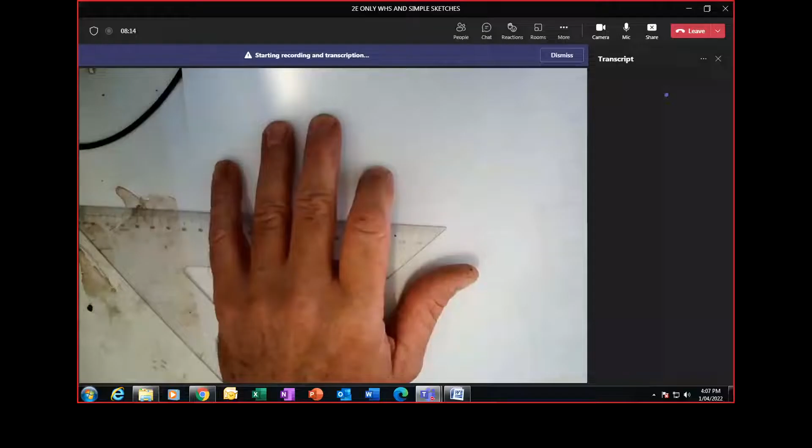Okay guys, so back with another drawing. This time we're going to draw an exam question. So we're actually going to draw from Word. What I usually try to get out correctly in class and then draw is basically written down for you guys to follow. So just sort of think of it like that. So we'll just look through a typical sort of exam question.

Question 1: using a scale 1 to 10, provide a typical sketch drawing of a complete vertical section through a timber frame house with platform flooring supported by an external 110 brick perimeter wall on a 400 by 400 RC strip footing. Reinforcement is this, L11TM top and bottom with R10 stirrups at 900 centres. That's pretty easy. All right, so that's one.

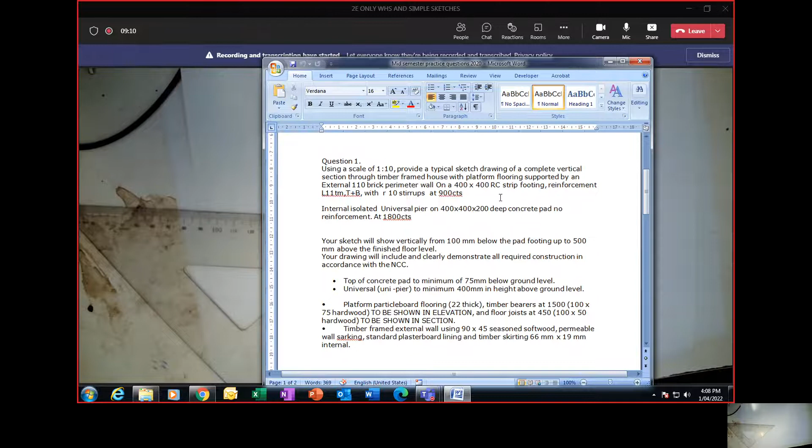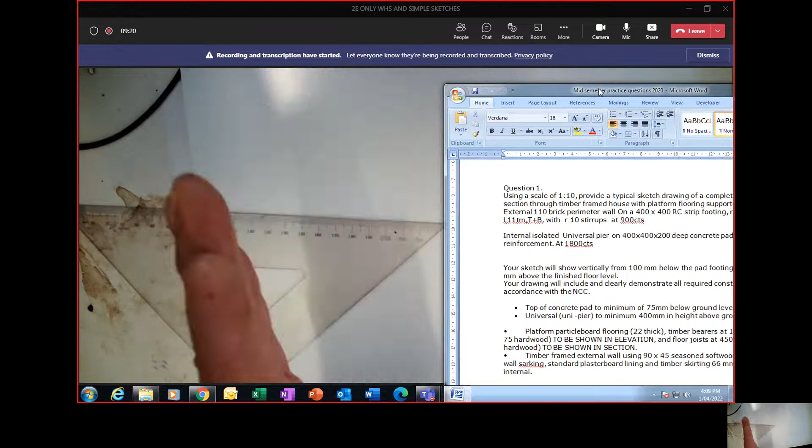It means that the timber frame comes all the way to the front, all the way over, and there's an external perimeter wall underneath that. That's, as we know, going to be a minimum of 400 off the ground line at least. And we've got some mention of an internal isolated pier, universal pier, uni-pier, steel uni-pier. We remember what they were. We drew one of those. Just on a 400 by 400 by 200 deep concrete pad, no reo, and they're at 1800 centres like all isolated piers usually are, and are in accordance to code.

Your sketch will show vertically 100 millimetres below the pad footing and 500 mil above the finished floor level, so it wants at least 500 millimetres of wall frame showing. The drawing will include and clearly demonstrate required construction according to NCC: top of concrete pad 75 below, universal unipier minimum 400 in height above ground level. Okay, so we know that. Platform flooring, so that means particle board flooring. We mentioned it was a platform floor, so that means it goes underneath the wall frame.

We're talking about the bearers here, timber bearers at 1500. Well, that's wrong. That should be something like 1800 centres actually. 100 by 75 hardwood to be shown in elevation. So that's the long edge, we're looking down the face of them. And the joists are at 450 centres, it should say. 100 by 50 hardwood to be shown in section. So you're going to show every joist along the bearer, and we're going to have the cross hatch on those.

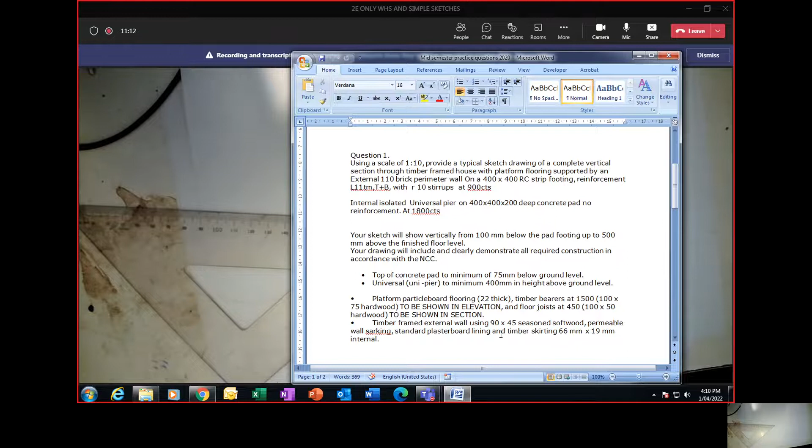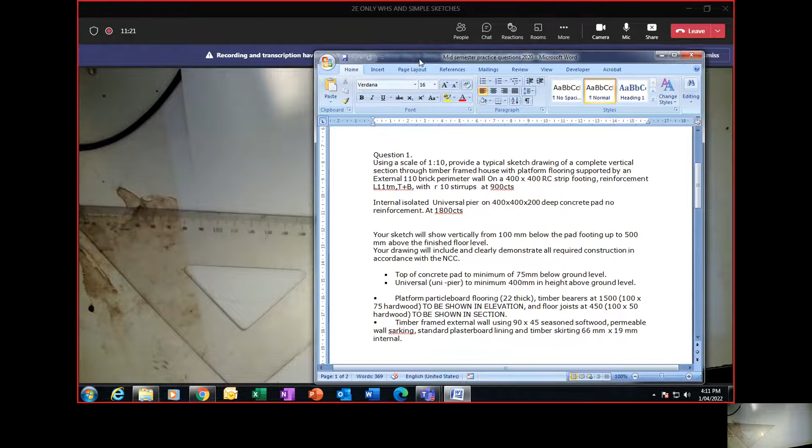Timber frame external wall, 90 by 45 seasoned softwood, permeable wall sarking. So we've got sarking coming down the front, standard plasterboard, so that'll be 10 mil on the inside, and a 66 by 19 internal skirting. Okay, that's pretty straightforward. We'll put that aside and draw as the question asks. Let's kick off with the ground line first, and a 400 by 400 strip footing, and we'll put the drawing together from there.

Rightio. So there's a lot to get on. You can still go vertically if you like, but in this instance I'd go horizontally with the page, and get my camera to focus on something. I can't focus on a white piece of paper. Come up about 60 mil maybe. Oh, sorry, no, we've got to get a 400 deep footing in here. So come up about 80 millimetres off the bottom of the page, and then simply draw your ground line all the way across the page.

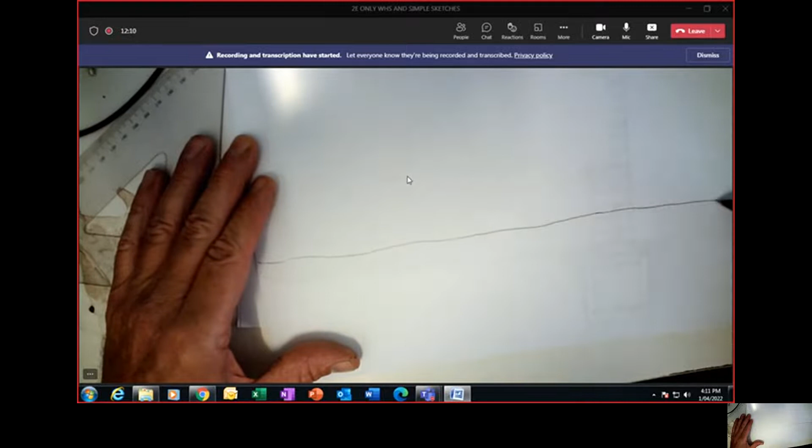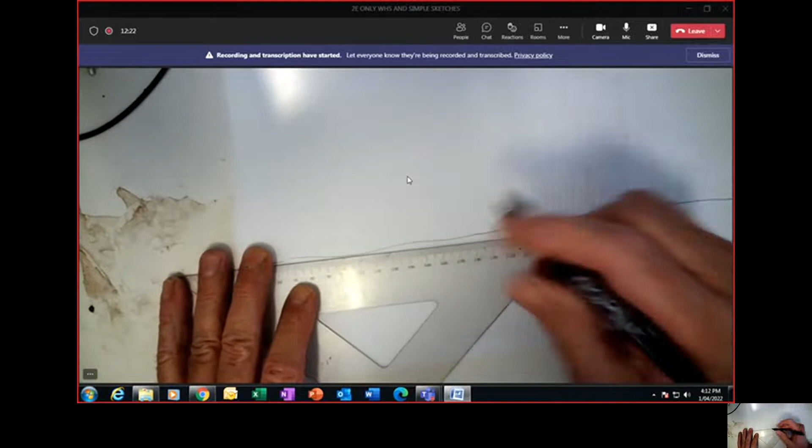We'll do the footing first. We know that it's a 400 by 400 strip footing. We can mark that out here. So our footing's going to be here. Our wall's going to be straight up there. Come across. Let's find 400 up here. Just gently there. We've got it there. Let's come down.

Remember, we want to be 75 millimetre minimum below the ground line. Here's the ground line here. So we'll go down 500. Minimum is 75, but we went down 500. It gives us 100 mil below the ground line. Coming across now, it's a 400 by 400 strip footing.

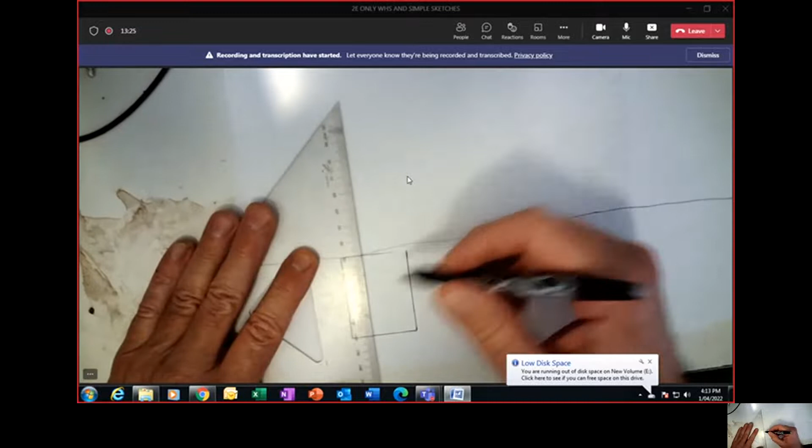Take that all the way up here. Oh, that's looking a bit groggy there. We'll make sure our lines are parallel and our box is nice and square. Let's come up 400 and cap it off where our concrete's going to be finishing. Don't worry about the backfill and the ground line. We'll rub all these out. We can get rid of all these lines here.

Get rid of those lines there. We can bring our ground line down. Because remember, we excavate, rarely ever get a totally square excavation, but we'll just excavate in like that. Put our steel in when we're down here, come down 40 millimeters, come in 40 from either side.

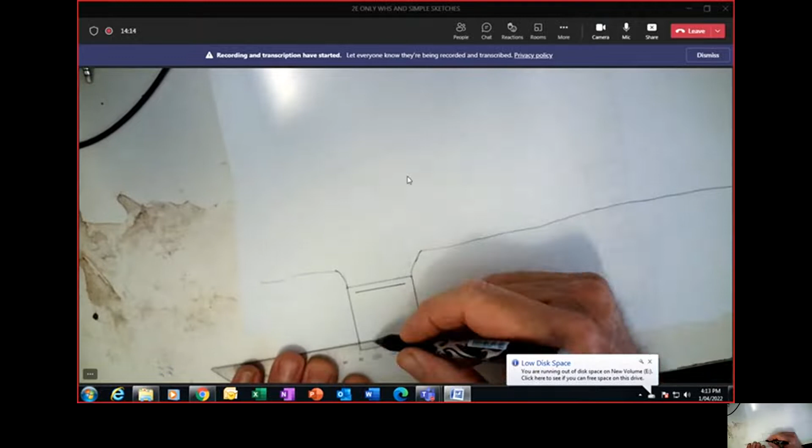Here's our top trench mesh going in. Same thing at the bottom, just repeat it, up 40, in 40 either side for a 40 mil of cover. And it's a 3L11 bar trench mesh, 11 mil bars, top and bottom. We've got those in place. Let's put our stirrups in now.

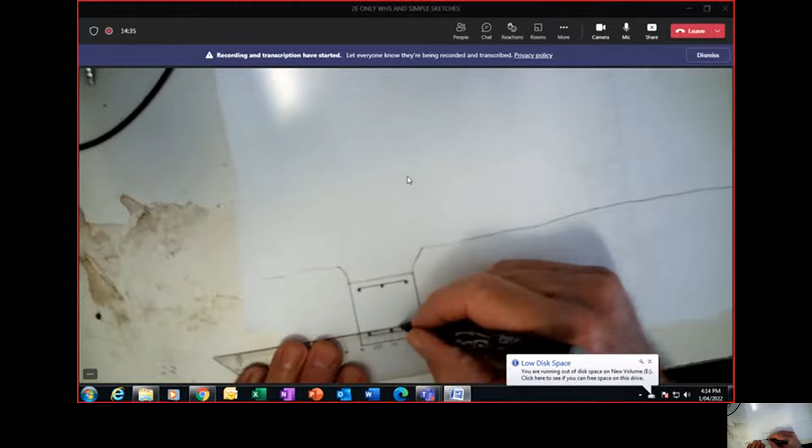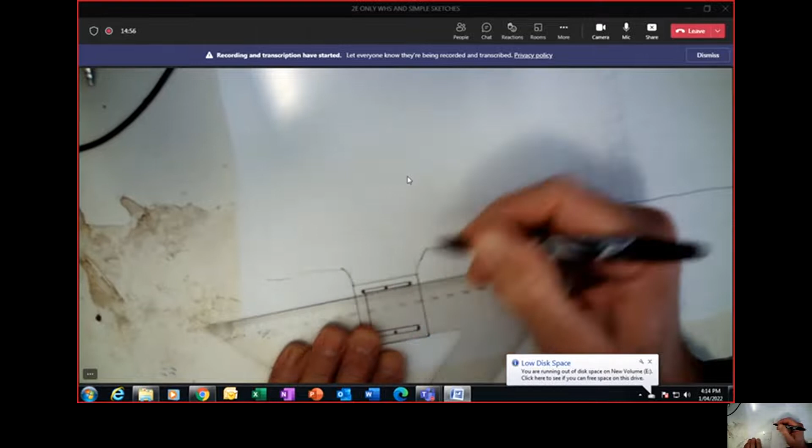Come inside, R10. Come up to the underside of the bars there of the trench mesh. Let's put a join there in our R10, making it obvious that is stirrups. Stirrups come like that, bent, and they have a join there.

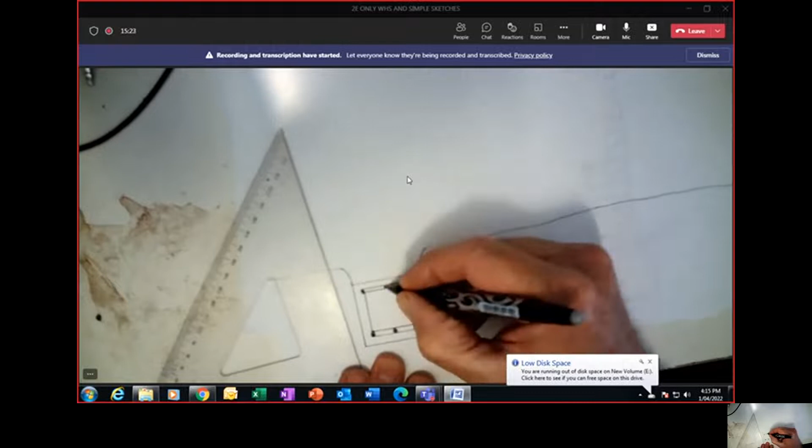You could even put a little lace there and lace it with some steel. Make it look a bit more substantial, making sure they all touch. Going over those, making sure our bars all touch. Reasonable to scale. Let's come up to the footing now. We'll find the centre. We'll get our external wall to sit on the centre and we'll mark it out. There's our centre.

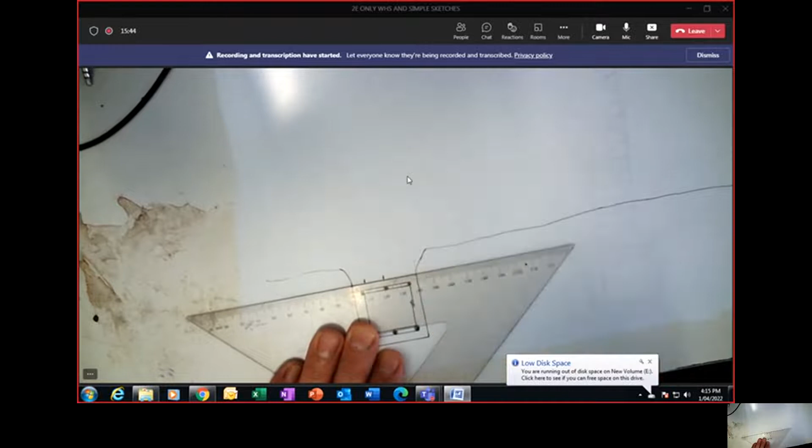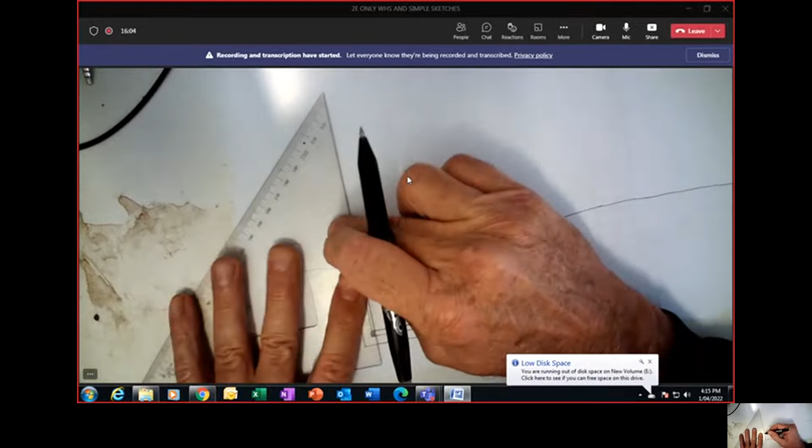External perimeter wall, 110. Attached pier for that wall to sit the bearer on. Come across the 10 mil perp joint, sorry, vertical joint, and come across 110. We can bring this line right all the way up because we're going to mount the timber floor frame and the wall frame on that. So we'll keep that line, get it parallel to your page, make everything look square and neat, then strike that line, come up fairly high.

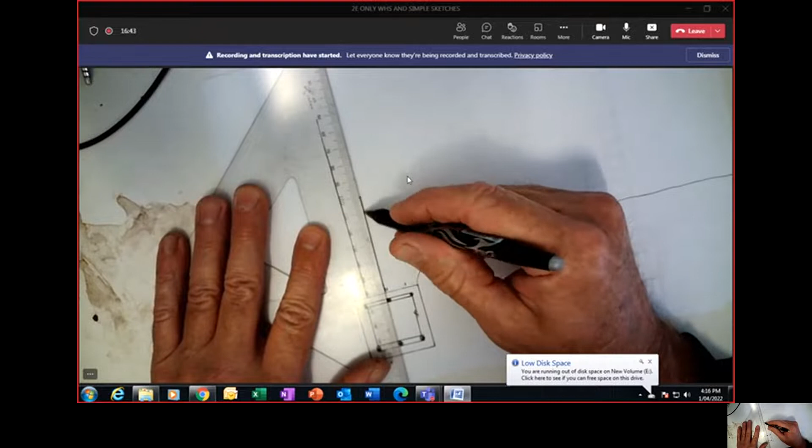And let's come up, we're going to bring our external wall up at least 500 off the ground line there. Yes, I'm going to find it there. I'll do my 110 wall first. Coming across, I'm doing my attached pier now and doing the outside of the attached pier on the outside there. External skin, attached pier.

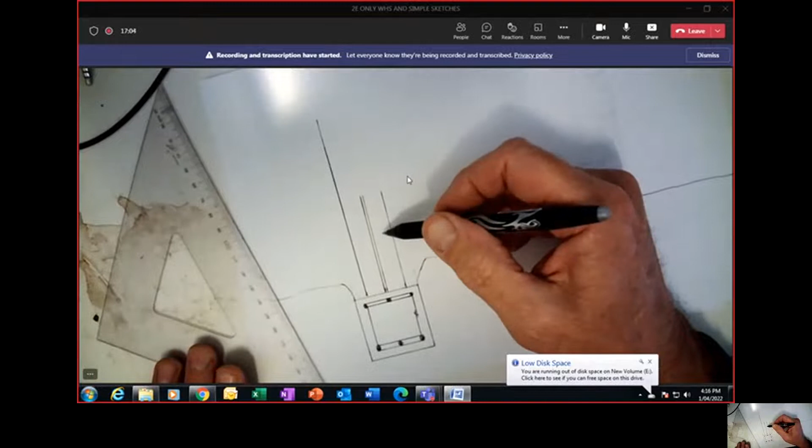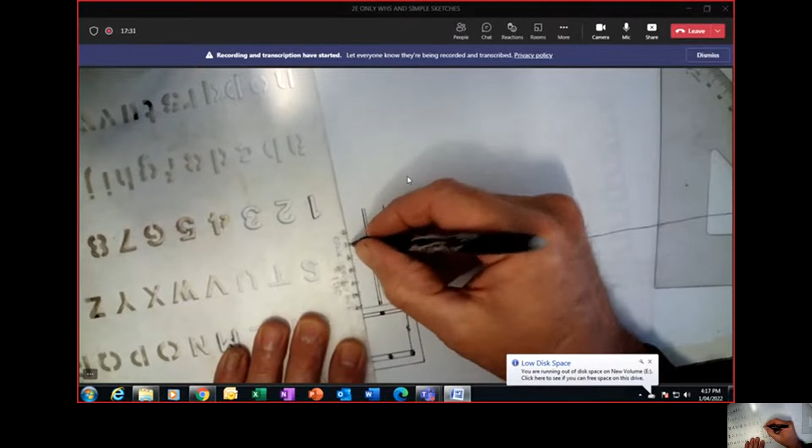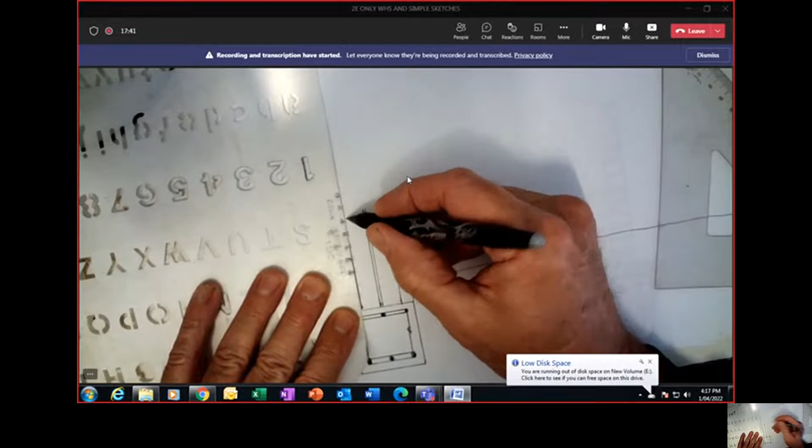What we'll do is we'll gauge those up before we put the ant cap on. So what I'll generally do, and as we know, we're drawing to 1:10 scale. So I'll reach over and we'll grab that gauge and just mark it off. I simply just put 7610 in the scale of 1:10 on a plastic template there and made my own template. Just make sure that you're at least 400 off that ground line, and you are. You're up 500. That's perfect.

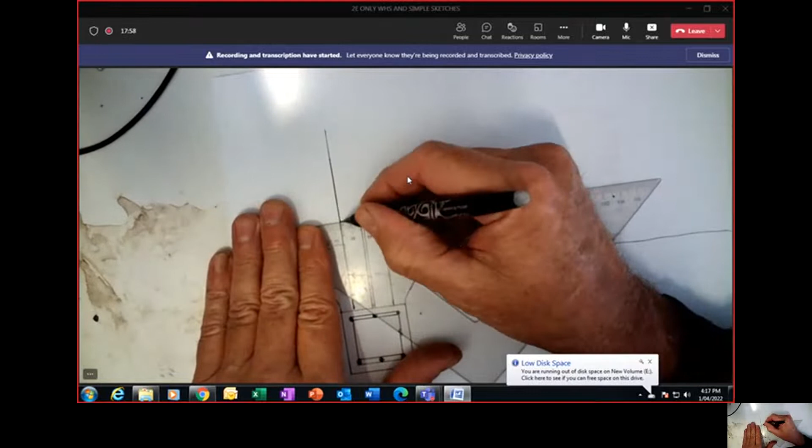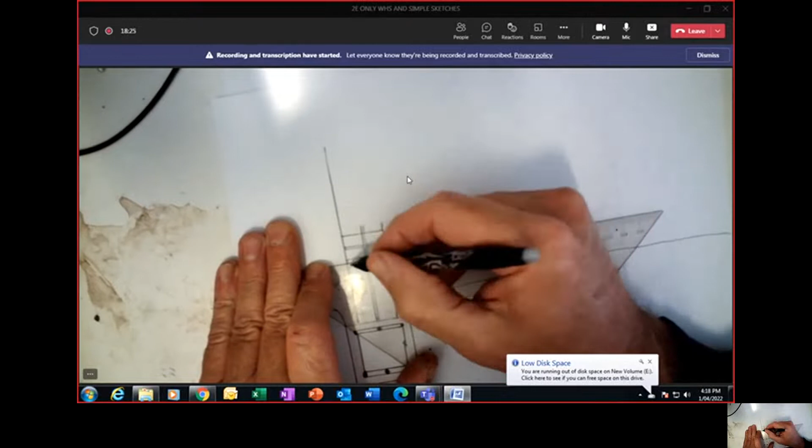That was a perp there. We'll get rid of those other lines there in a minute. Let's bring that straight across. We'll mark all our brick gauges now. Brick, external skin, attached pier, mortar joint, bed joint, brick external, brick attached pier, mortar joint, and brick external, making sure you cross the lines. It's okay to cross the lines.

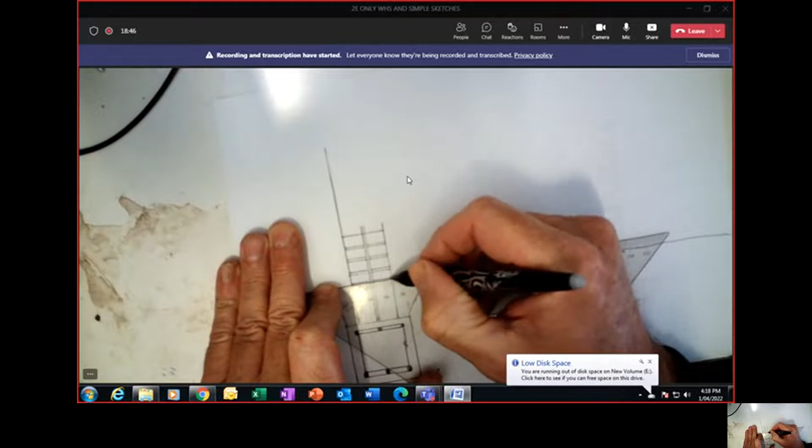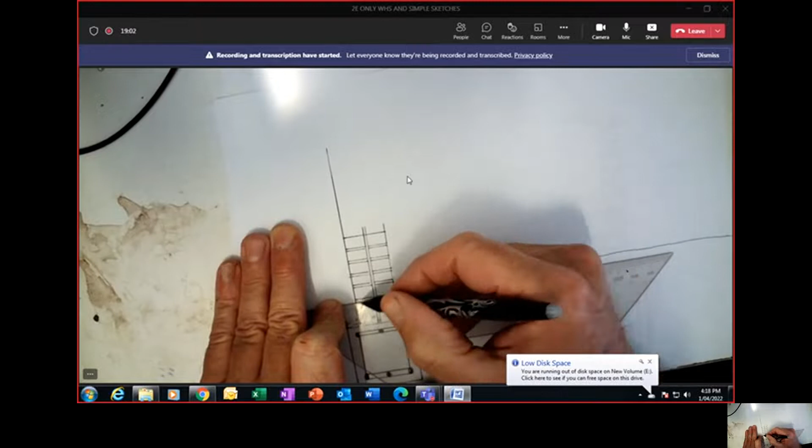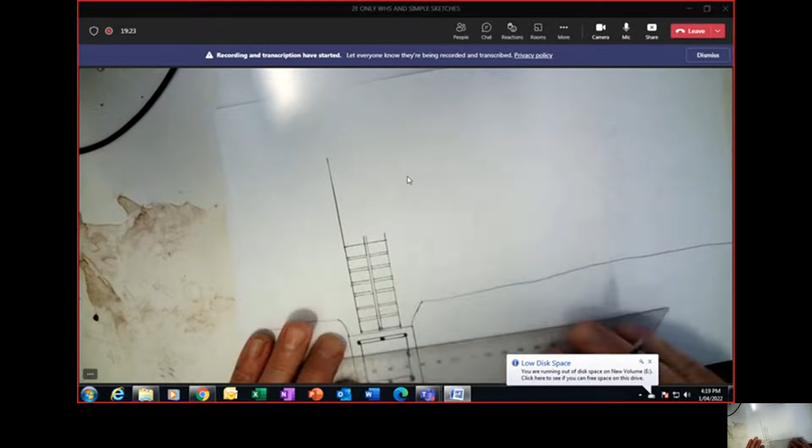And we'll just continue that all the way down there. Almost done, couple of bricks to go. Brick, external, internal, mortar joint. You've done it, and to be honest with you, that's probably the hardest part of the drawing, really. You can rub off the excess up here.

All right. Now that we're up here, keep your drawing sort of moving along. Remember, you're backfilling around the attached pier. Put your backfill indication in. Not into the external skin. Remember, we've cut all the way through there. We've cut through the ground as well. You don't want to show that. Let's just put some indication marks that this is the ground line here.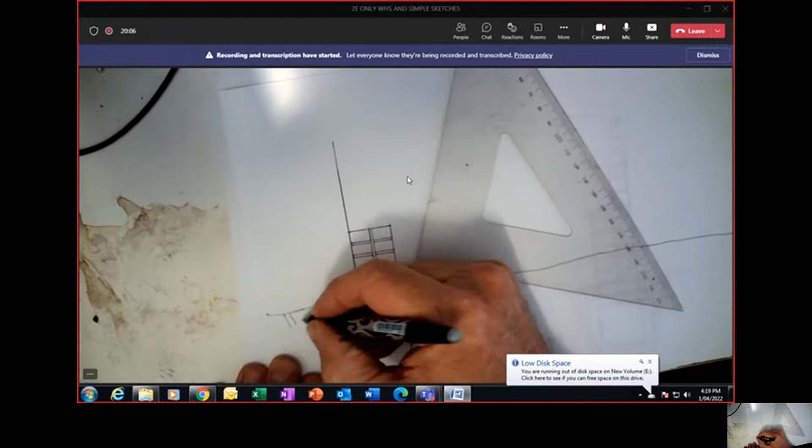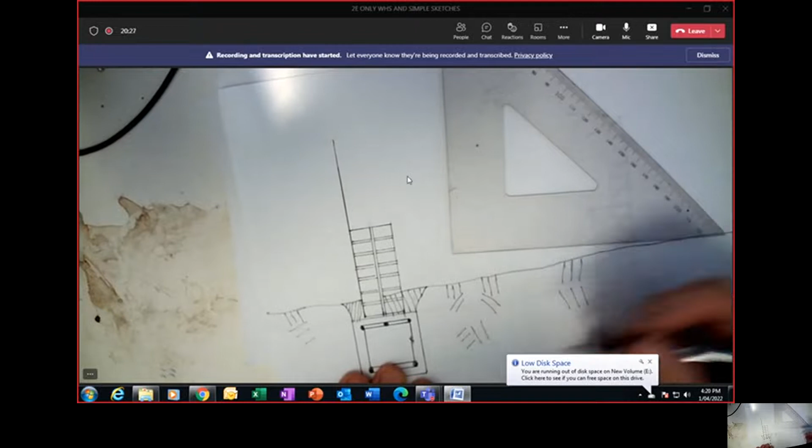It's probably the simplest form of construction, the old timber frame on external perimeter wall. Don't go crazy. We're going to put another pier in here, remember. So again, you're just going to check that. I've just got 400 on the line. That's okay. We can be fine with that. The first thing I'll do is I'd like to come down 40 here.

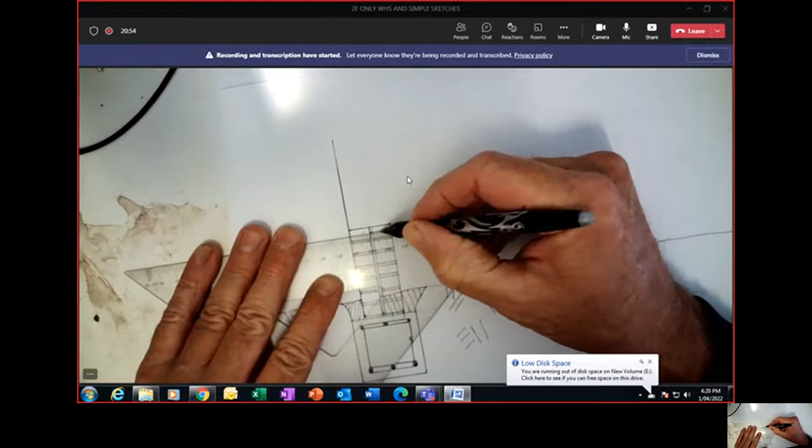We're going to indicate our ant cap. Make sure you come out 40 there and join those lines together. Thicken it up here, making sure it does actually go through all the way, but we've technically cut it off here because we've cut through this wall. So we'll put the hatching on for that now.

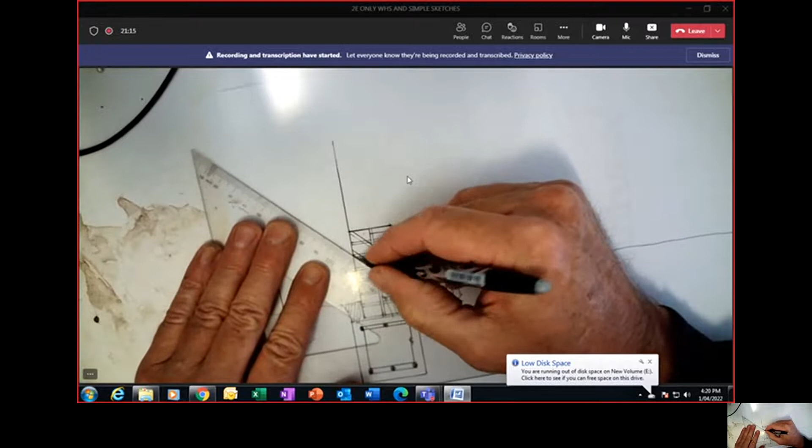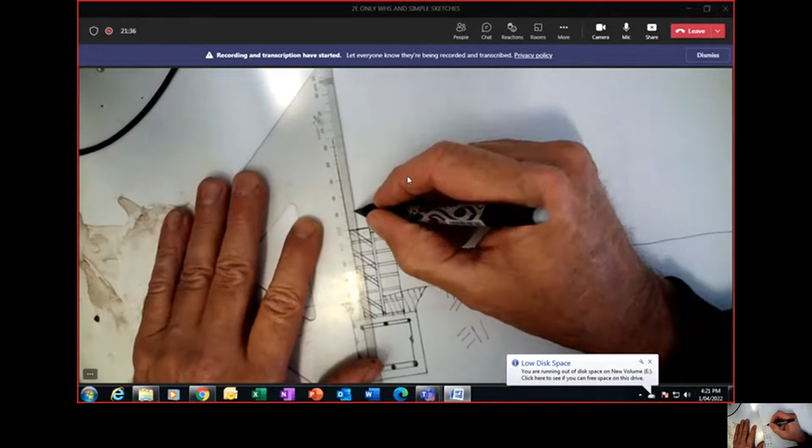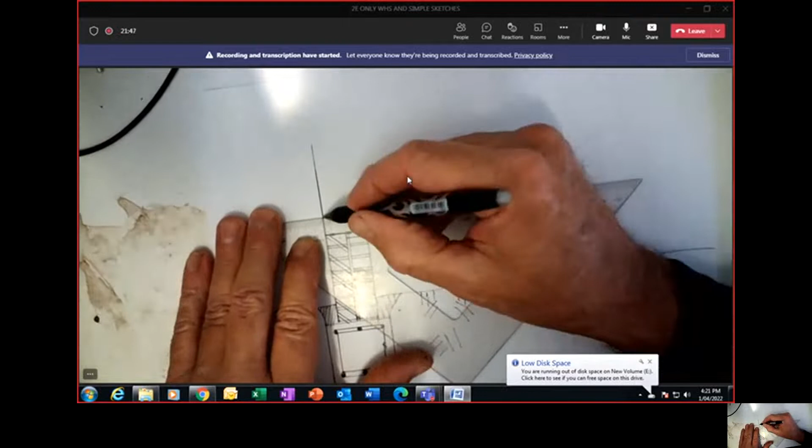Okay, so we know we've got a bearer in elevation. Okay, well, we can put that on. We can come up 100 as the bearer comes all the way over. And we'll bring that over the page with the break line in it. I'll show you why. So we'll stop there, about here, and continue it on.

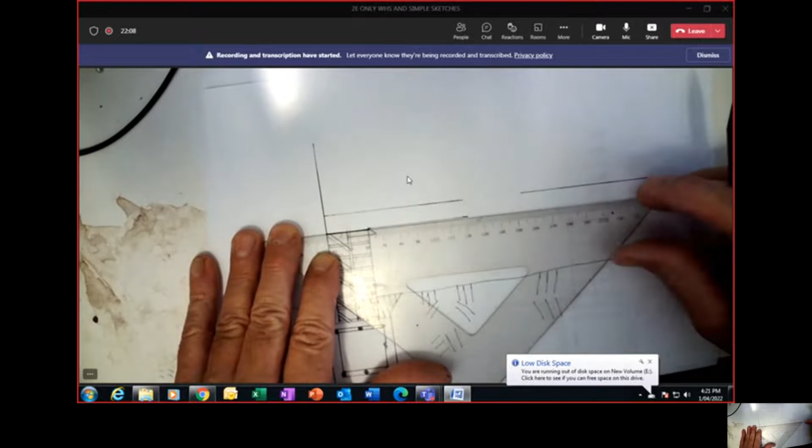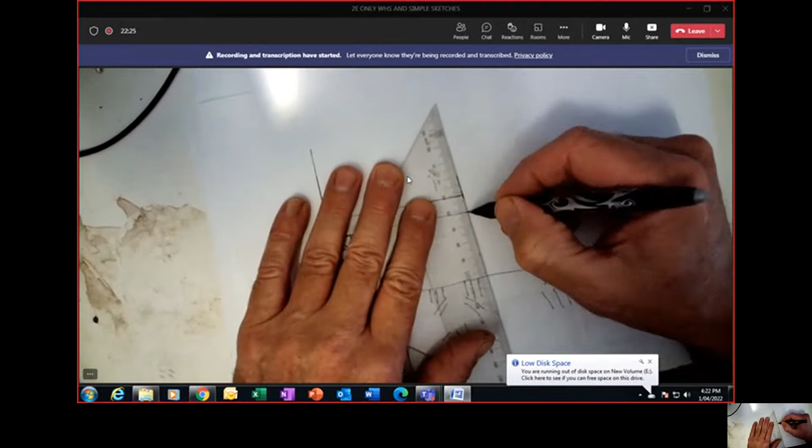Down the bottom, you're still marking the bottom of the bearer now. Here's where we're going to draw the uni pier in a minute, but we'll finish off this timber frame. Yeah, put a break line here. And one here because we can't fit 1800 centres on this page. But we need to get all the detail in.

It's a platform floor, but we'll put the joists on first. And remember, these are going to be shown in section. So what I like to do, and I'll show you the right way to do this, is we'll come out 90, come up 100. There's the tops of our joists. All right, we'll just mark that 90 line there.

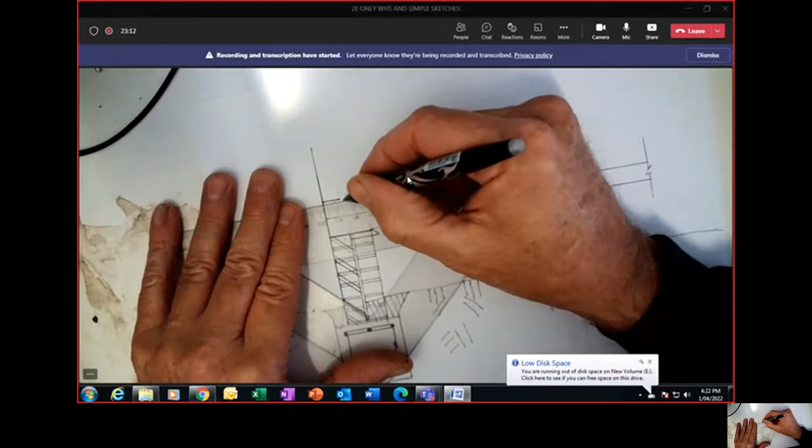This way you get the joists in the correct position because it's a 100 by 50 joist, so you want to center that one directly under the end of the wall there, the edge of the wall frame. The wall frame goes back up like that, and then come back over here and put your other one in there. Make sure they're about 50, but they're a little bit undersized.

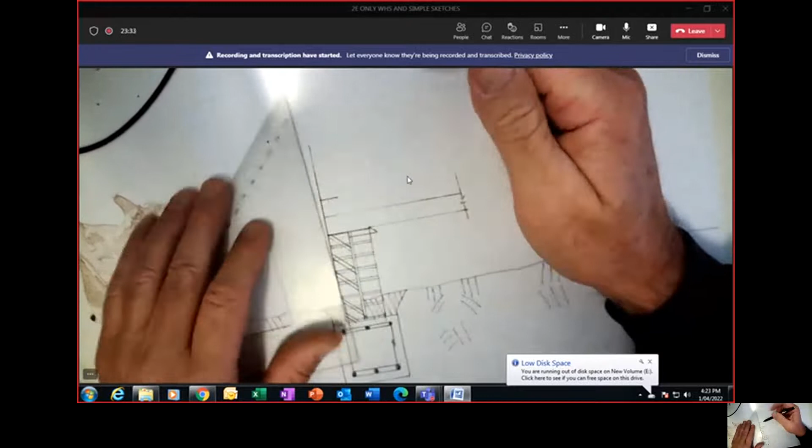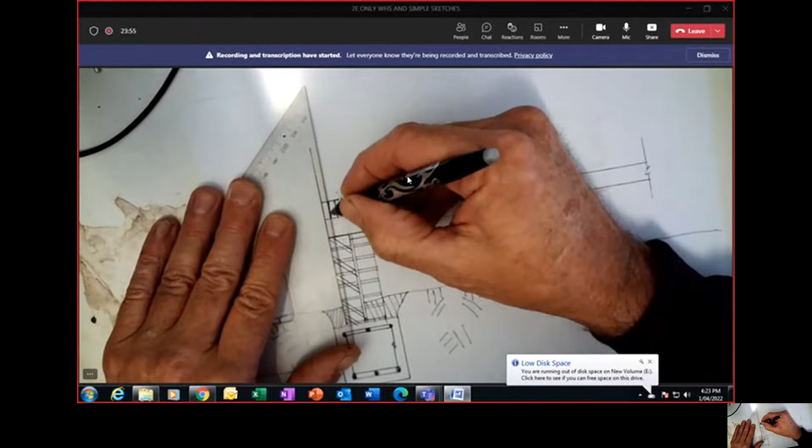Now that you've got that, you should have this one here. As I said, centered under the wall frame. I won't put the wall frame on there because I've got to put a platform floor across it in a minute, but we've got to end up with a bit of a configuration like this. So this joist flush with the leading edge, this joist about at the halfway point where the wall frame starts.

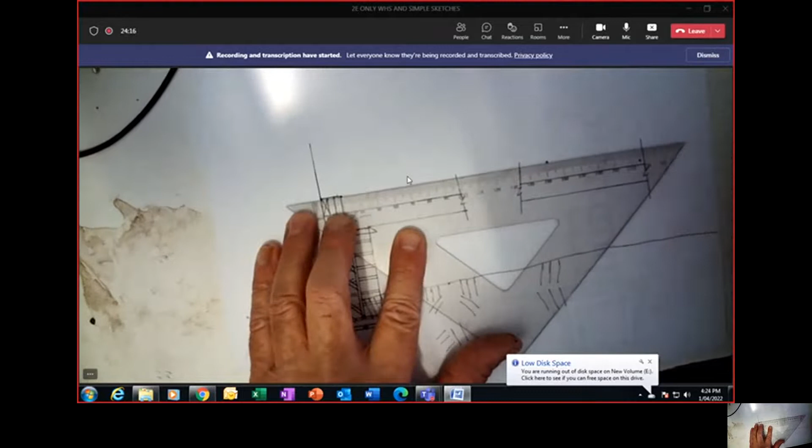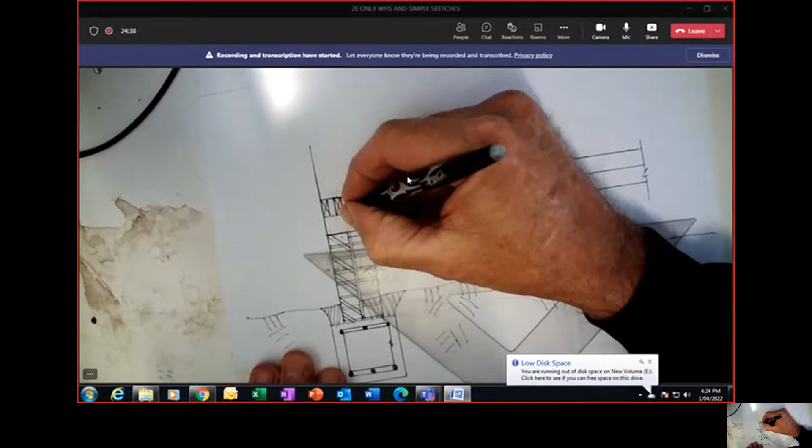Once you've got that in, you can make it a bit easier for yourself. You can transfer the top of the joist all the way across in between your break lines, to where you're going to represent it over here. And then we'll put our cross hatching in. Remember, making it very defined. We're cutting through a structural member.

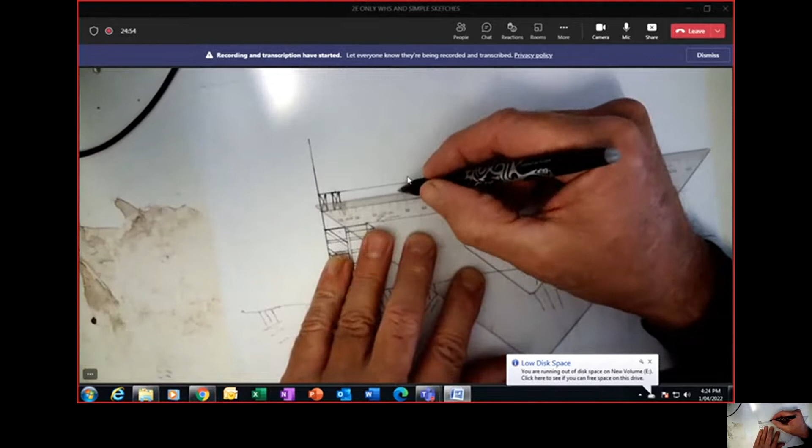We'll need some more joists. And remember, if we read through, it said 450 centers. So come to the outside, find 450, and mark your joists. It's just 100 by 50, but they usually always finish about 45.

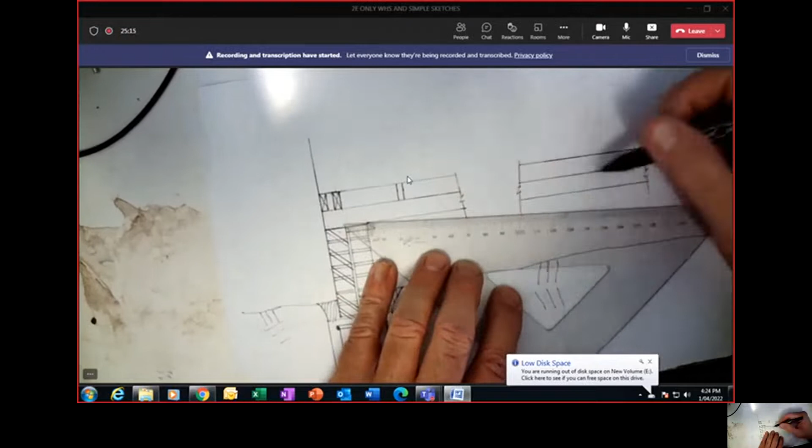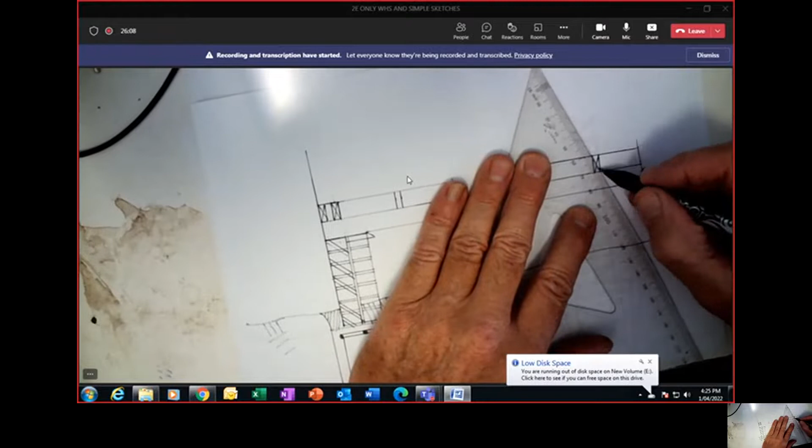Sometimes it helps a little bit to use your set square when you're marking the hatching for a structural member. Just keeps it a little bit neater. So how's the time on this? Oh, we're going okay. We've usually got more than enough time to finish these drawings in an exam situation.

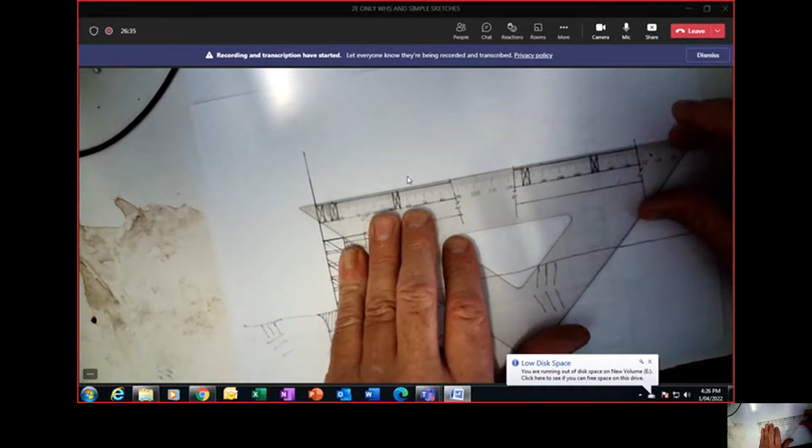Let's complete the timber frame. We'll come back to it. We'll do the uni pier next. So I've got a 19mm platform floor. So I'll just come up almost 20mm there, and we'll mark that to the break lines. Let's put the 90 by 45, so find 90 again.

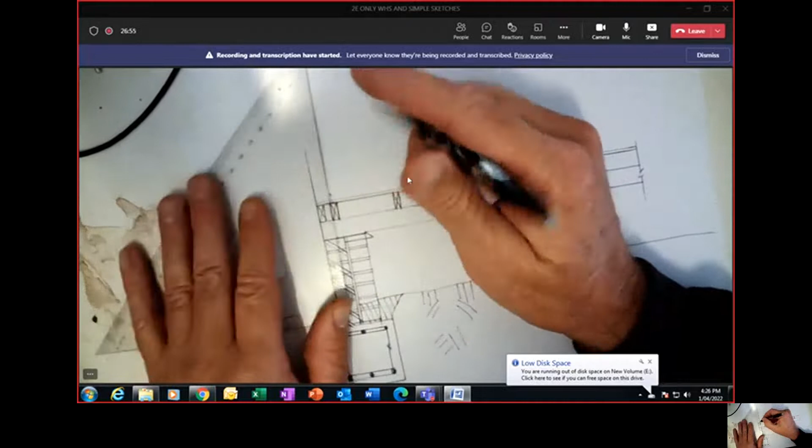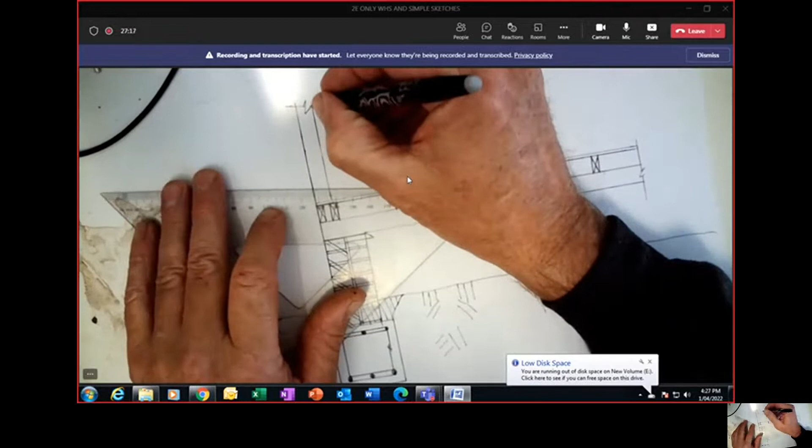Wall frame in place. Remember he said he wanted it about 500 at least above the finished floor level. We can come up a little further than that if we wanted to. Put a break line up there. Might just put the plate there while we're here and complete the wall frame. And we'll cross hatch that.

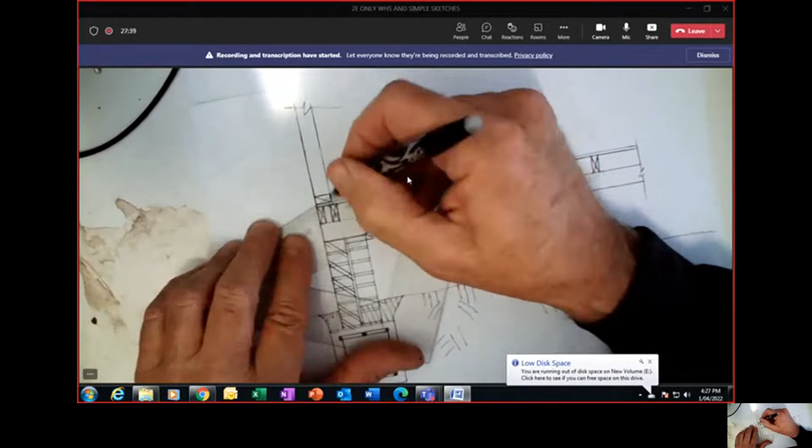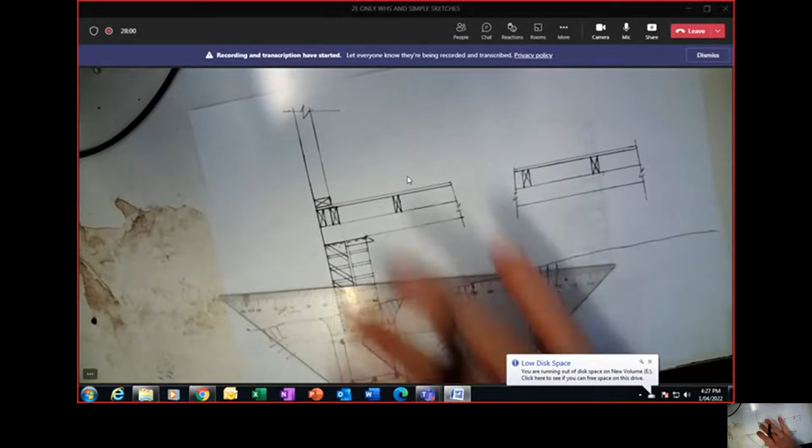Now, as you work your way back down the drawing, we're going to come over here and do the pier now. Just double check, and you'll see that I've actually left the damp course out of there. Always put a damp course under your ant capping to prevent the ant capping rusting out. Get back to the wall frame. Remember, we've got gyprock and skirting to go on here, and we've got some permeable wall sarking. We'll put that on in a moment.

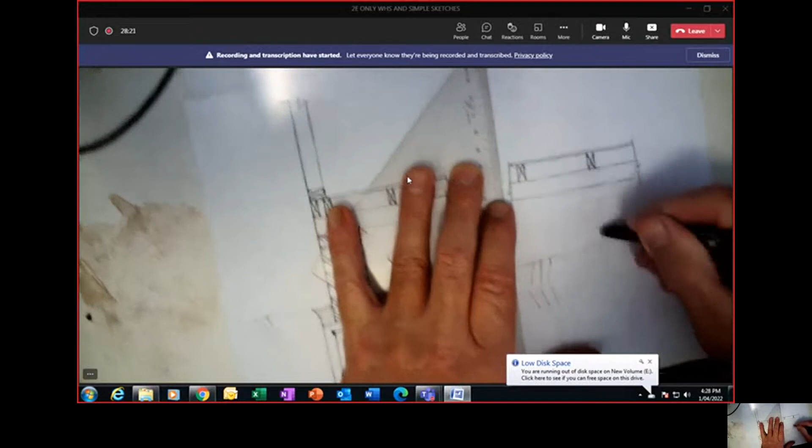Let's come over here where things get really interesting, and what we're going to do here is we're going to draw the uni pier. So we can find a section here, we can clear away some ground line. And we know that we wanted at least 75 millimeter down off the ground for the top of both the footing and the pad footing from the ground line.

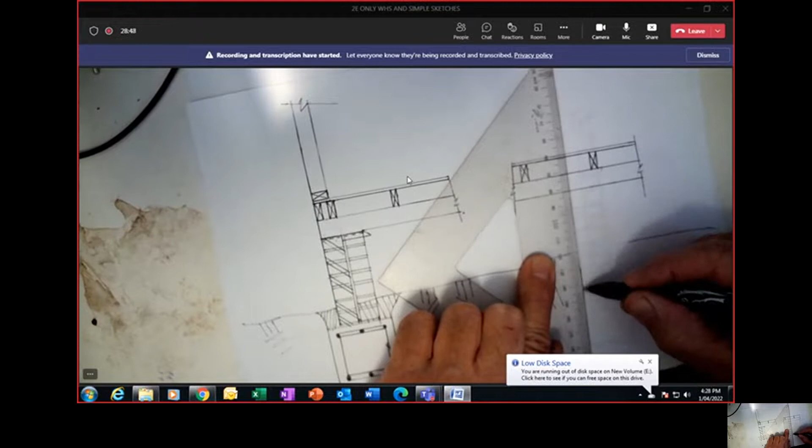I'd come down 100. Let's go down 200. And they're 400 by 400 by 200 deep pads. So I come down off the ground line 100 mil there.

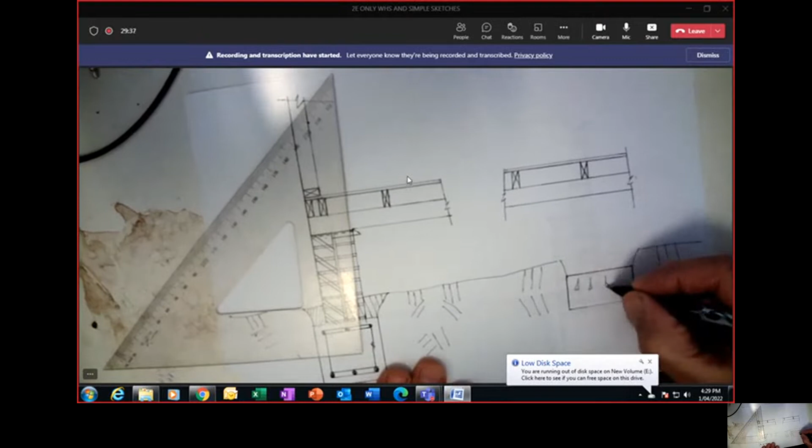Bit of a trick. We can finish that all off now if we like. Finish off the ground line. Put some concrete in our pad. We forgot to put concrete in the strip footing over here.

Star triangles with dots. Come to the center of your pad. You remember that the uni-pier base was something like 150. So you come 75 off the center and then find 150 this way. Come up 10 mil. Remember they had a 10 mil by 150 base plate?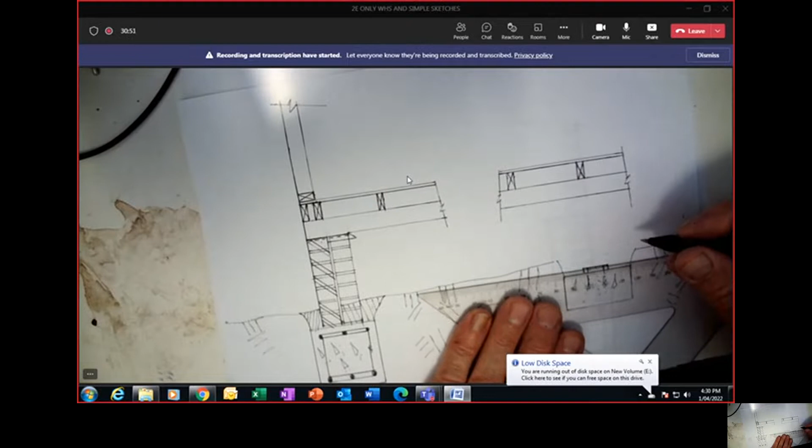You put the base plate on. Remember they had bolts. Some hidden details for the 12 mil galvanized dynabolts. Find the center of that. And remember they had a 65 millimeter stem. So we'll come back a full 3 millimeter either side. What I mean by full 3 millimeter is 3 millimeter plus. And that stem, let's just draw that faintly for the moment, as it breaks into hidden detail.

Then we remembered that they had a 150 millimeter deep telescopic head that fitted over the top of the stem. And we won't be able to see where it connects this time because it's actually back here. We can't really put bolts in there in hidden detail showing where the connection is. The plate goes up behind it this time. So we just run that up.

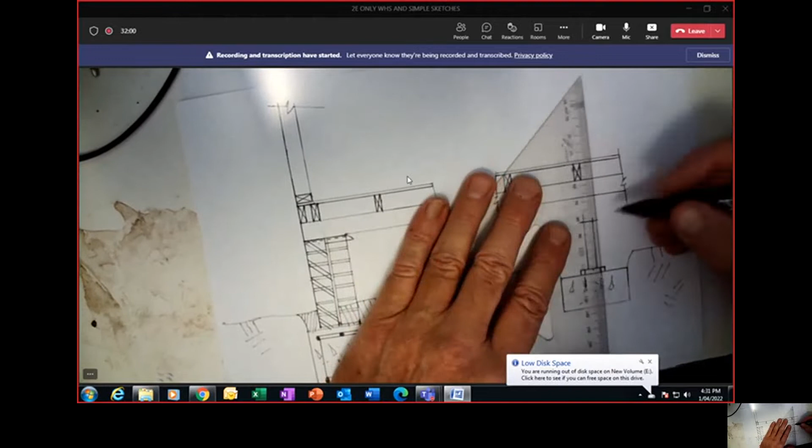Actually, no, you wouldn't yet. I'm just trying to think. No, you will see that. So the plate is actually behind the bearer in this instance. We'll put the two locking screws in though. We can lock them that way, and we can finish the hidden detail of the stem on the head.

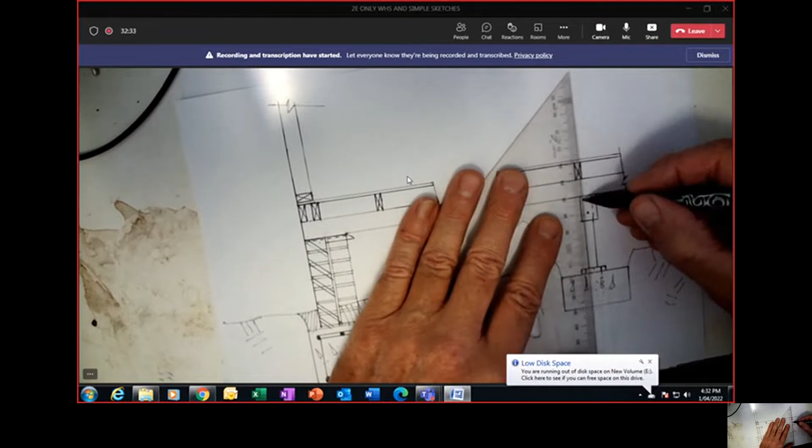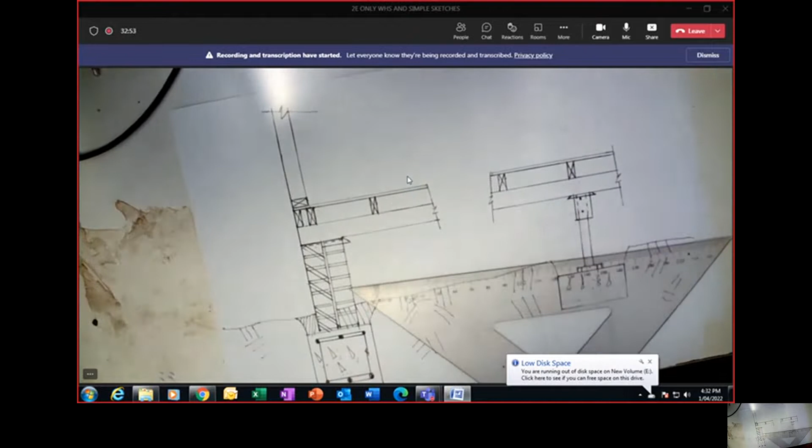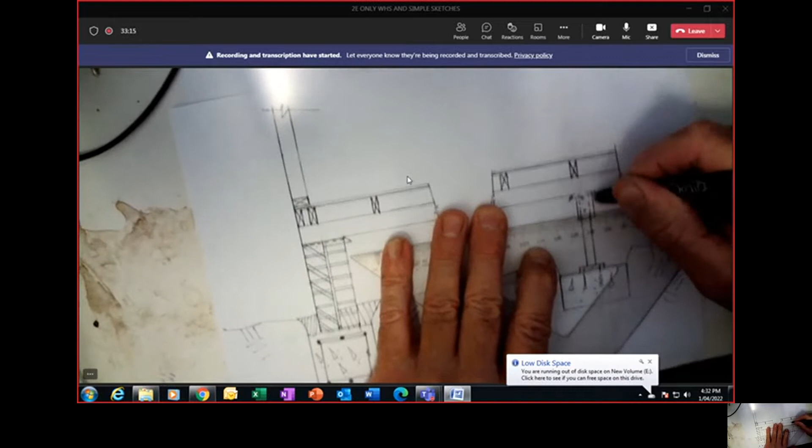Once again, we can draw the uni-pier ant cap, and it was exactly the same as the other one, just 40 mil protrusion all the way around. Should have made it as big as that one. We can easily fix that mistake though. We can just make it look a bit bigger there. And that's okay. Clean that up a little bit. Why not? Won't take a second. Yeah, that looks a bit better.

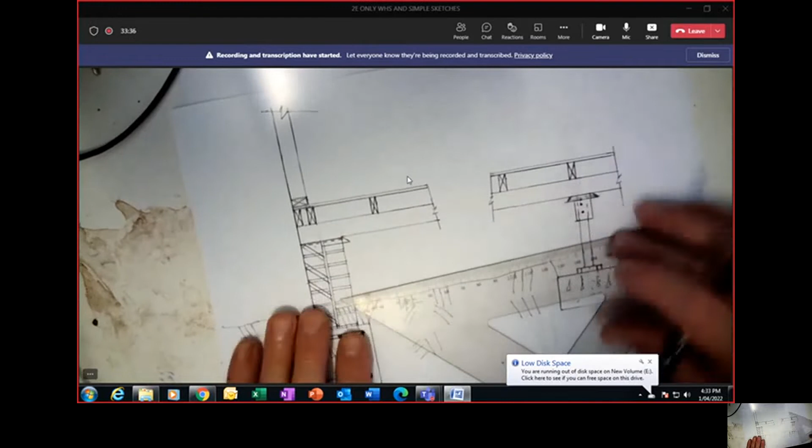That wasn't quite 40mm at all. And we'll get that screw out of there. Let's put that locking screw in here where it's supposed to go. There's our uni-pier in place. All right, well, we're almost there. If we look back, I think all we wanted after that is, yeah, what have we got here? Timber skirting, standard plasterboard, wall sarking on the outside, permeable wall sarking.

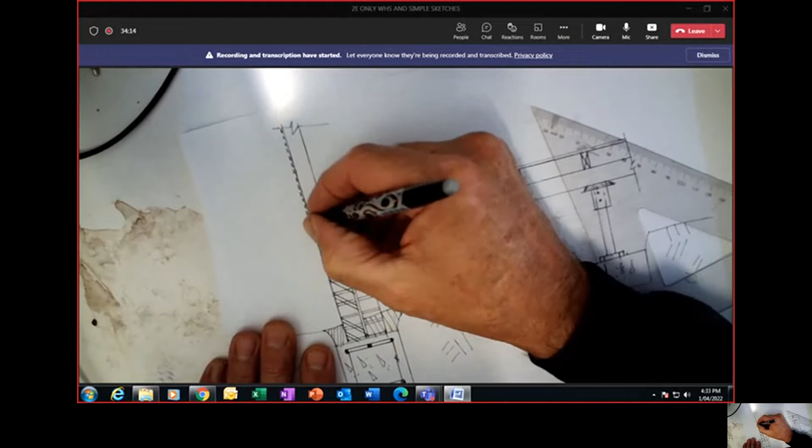Okay, well, we can easily do that in freehand, just by marking some hidden detail down the wall frame, all the way down the timber. Now, when we look at the ant cap, realistically, in most cases, most people will want that trimmed off, but it's not a very good idea. So we'll complete that ant cap there.

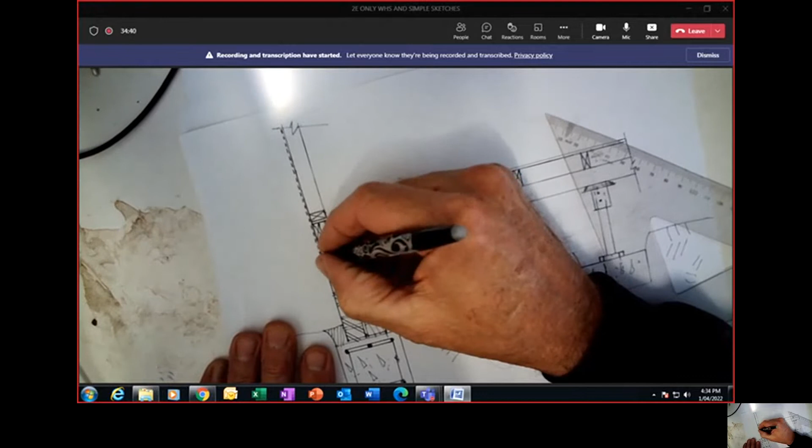I'll make that a bit deeper. Always making them a little too shallow. And we'll just make sure the sarking runs over it a little bit. Now cladding will sit on there and be fixed onto that wall. Then we can finish it off. We've got some 10mm plasterboard on the inside here. Try to keep that just a millimetre. Made that a little bit big. We'll pretend it's 16mm fire check.

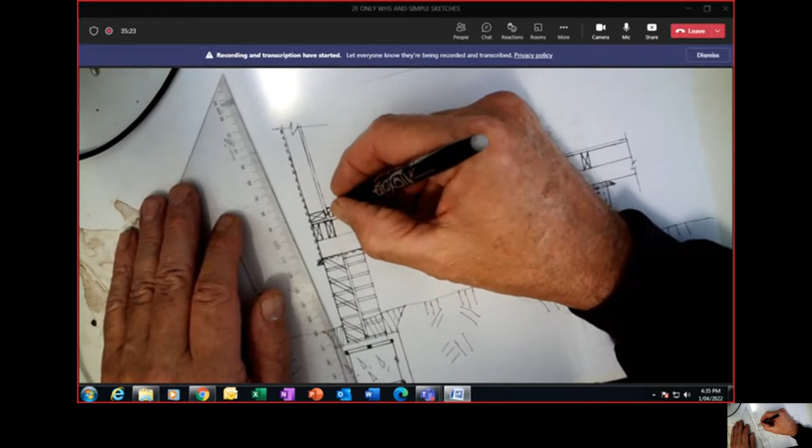66, I think it was, skirting. And we'll just make it a bull nose, bring that down. Complete that skirting. Notice how I've left a little bit of clearance under there, 10mm clearance for the plasterboard. Don't bring the plasterboard all the way to the floor. When the floor goes up, it won't put pressure on the plasterboard, or won't pop the nails on the plasterboard.

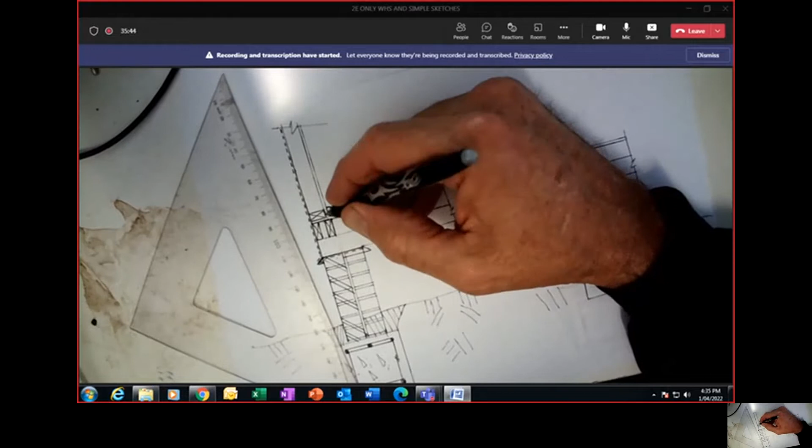Things will move around in there. Base plate will shrink a little bit. The joists will shrink a little bit. That'll bring that down a bit. Or they could gain a bit of moisture and expand. And if that touches the plasterboard, it can start popping the nails if there's no clearance there. That's very important to remember.

Other than that, that's basically the drawing here. We can put some backfill back over here. Left that off around the uni-pier there. The correct hatching for backfill is close free-handed parallel lines.

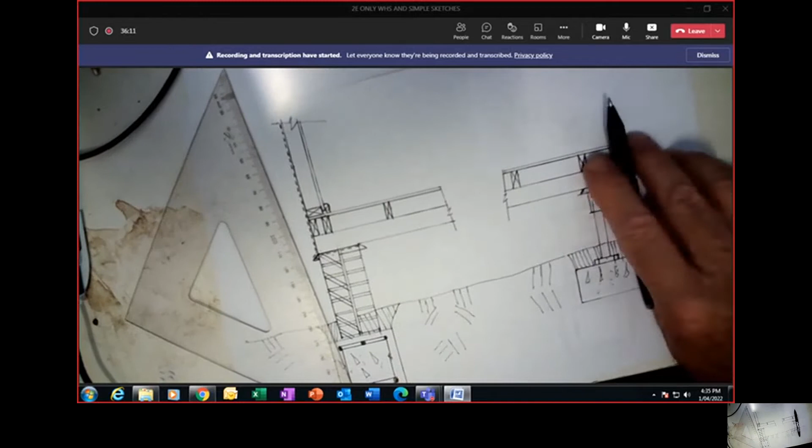Now, as for labeling, well, guys, I'd simply just label as you've read off the drawing. You're looking here, 400 by 400 strip footing, label that, label the reinforcement in it, label the external wall, the attached pier, all these components here. Keep the labeling neat, keep it all in a straight line. Try not to get your pointing lines crossing each other.

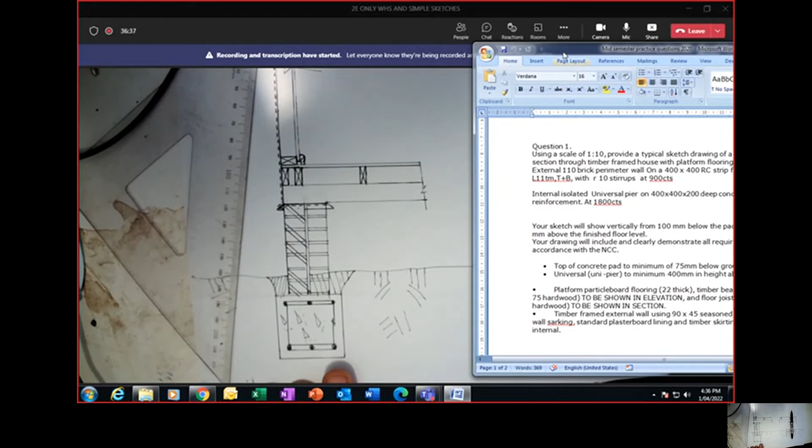Same with the uni-pier. Dimension your centers, or mention the centers, mention this component here, mention what centers it's sitting at, the relevant codes, and you shouldn't have any problem.